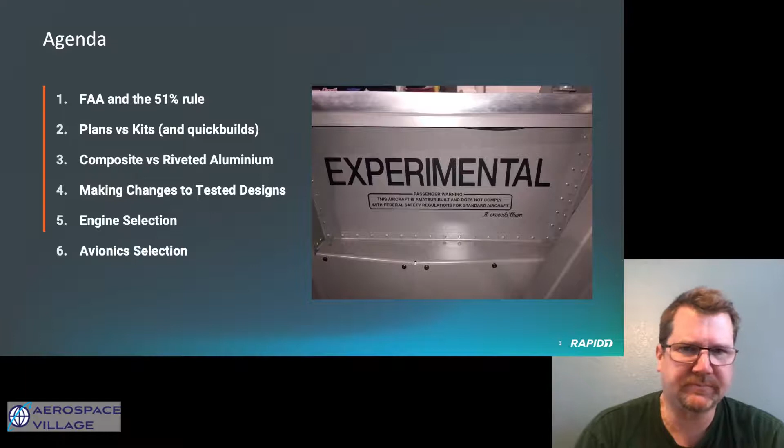So the FAA defines the language for what is permitted if you're going to build your own airplane. Certified aircraft have a ridiculous amount of regulations they have to comply with for safety, to ensure consistency and everything else, and it's one of the reasons that makes certified aircraft so expensive.

Experimental aircraft are not cheap by any means whatsoever, but they are a little bit more advantageous. The FAA defines the rules in Federal Aviation Regulations 21.191 Section G, and then they've got an advisory circular, 20-27, where they clarify some additional stuff because of what some of the other manufacturers are starting to do.

The biggest thing is you need to have proof. You need proof that this was built by a person and not a company. So this is basically taking pictures of your work, keeping a blog, keeping other records showing that you bought the components, that you put them together, something showing your progress.

The work can be started by someone else. You can actually buy somebody else's amateur built kit and finish it yourself. Of course, caveat emptor, you don't know what their skill set is, so you need someone who knows to help review it and be able to actually examine the work up till then and see if it's sound. And then you can also have help. That's how quick builds work. There are a lot of programs where you can actually go to a factory and do most of the work, and then you just have the instructors there to guide you so you actually comply with that 51% rule.

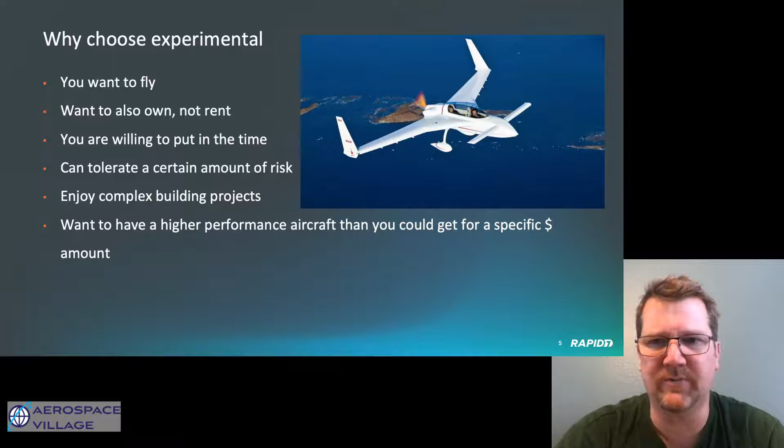So, how are you going to build it? There are a few different ways you can go about this. You can buy a set of plans. I actually have a set of plans here for my kit. This is a set of Cozy plans. It's a very thick, large bound manual that also comes with some very large format drawings.

So this is some drawings of the instrument panel using conventional gauges, and that's just one section. There are two sections in the plans that actually cover the whole thing.

The other thing you can do, when you buy plans, you source everything yourself. You're going to buy all the components - for example, all the fiberglass, all the epoxy, all the individual metal components. You're going to buy the engine, the airframe, the avionics, and build the airframe from scratch using just plans. It's the least expensive option. It's also the most time consuming.

The way kits work is you purchase the plans and partially completed parts, enough to qualify for the 51% rule. They have some quick builds where a lot of the stuff is done for you, but you still have to finish it. It greatly decreases the amount of time you spend, but also increases the cost. The picture I have here is actually from Sun and Fun 2017.

It's a Velocity Twin. It's a gorgeous aircraft, very high performing, beautiful inside, canard design, which you can kind of see my preference towards already. And then there's another thing called builder assistance programs, where you actually go to the manufacturer and they help you along the way, but ensure that you're actually doing enough to qualify for 51% of the work.

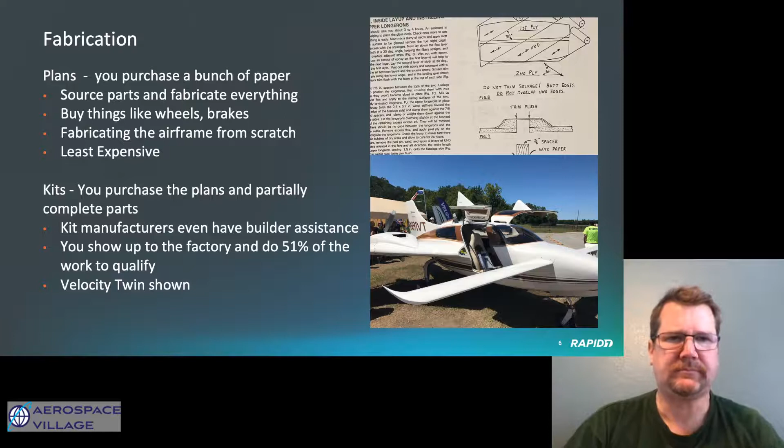And then there's different materials. So if you're going to build an aircraft, if you want just something low and slow, or maybe a small single seat aerobatic, fabric over wood is perfectly valid. The very first aircraft were made from these. You might have some just aluminum tubes, aluminum spars,

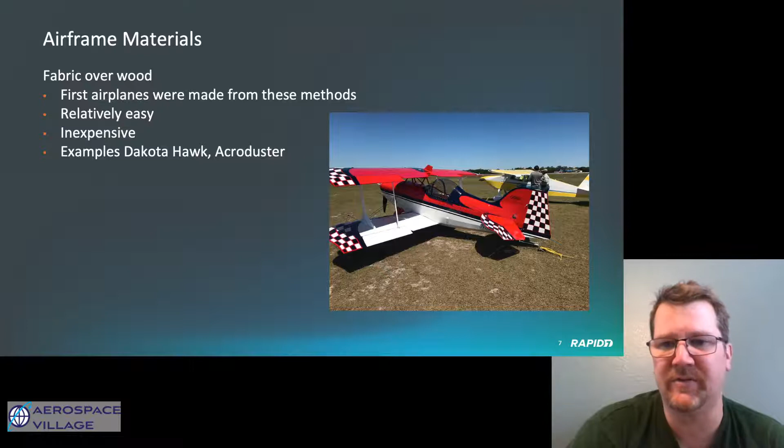and the rest of it's going to be wood. Wood's very easy to work with. It also can be very lightweight. And then you cover that with a doped fabric - a special type of fabric that's coated in epoxy to make it very rigid. Relatively easy compared to the other techniques, and inexpensive. This was just a gorgeous one that I saw at Sun and Fun. I'm not even sure if it's fabric covered, but it's the type of aircraft that you'll see.

Probably the most popular style out there, the one that has the most examples flying, is riveted aluminum. The Van's RV line of aircraft are all riveted aluminum, made with some composite components added here and there. That's how, for the majority of aircraft history, aircraft were built - aluminum held together by rivets. You have to be comfortable banging rivets, working with blind rivets, but it's very strong and light.

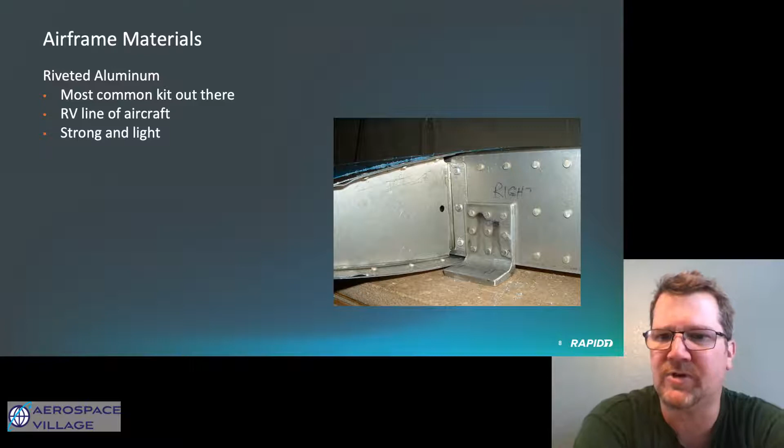It was only recently that aircraft construction moved towards composite, but you'll still see a lot of riveted construction out there for existing airframes. And now we get to my favorite, composite. So this is what I chose - fiberglass and epoxy, or carbon fiber and epoxy. You can see a beautiful carbon fiber airfoil here.

What is composite? Really, anytime you combine two materials, and when those two materials are combined, they form a stronger material, you get a composite. Concrete is a composite material because you have your aggregate, your sand, and your cement, and you get concrete. Sometimes with reinforcing structures like rebar added to it, but it's still a composite.

So fiberglass by itself is not a composite. Fiberglass, when it's bonded with epoxy, is a composite. Carbon fiber and Kevlar - not the bulletproof Kevlar, but an abrasion-resistant Kevlar - or also a couple of other fabric materials can be used in composite construction. In fact, newer aircraft like the Dreamliner are all composite construction. The 777X uses composite wings, and then conventionally fabricated fuselage.

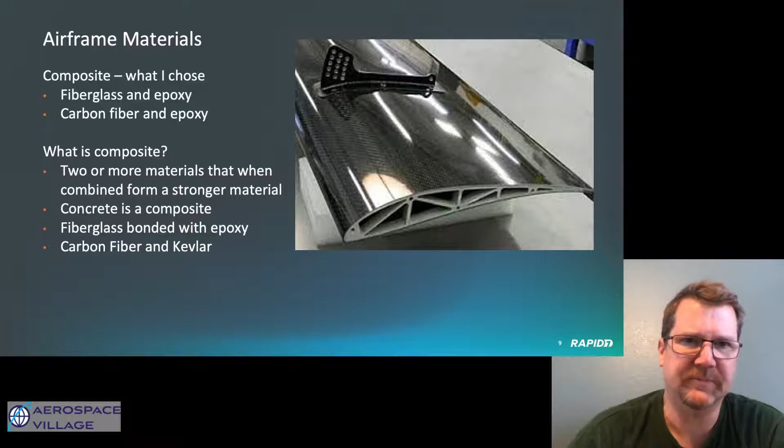So what I chose, the Burt Rutan design - this is a little bit about those, my favorites. He pioneered moldless composite construction, a method of fabricating fiberglass parts without a mold. You take a section of foam, and I have an example right here.

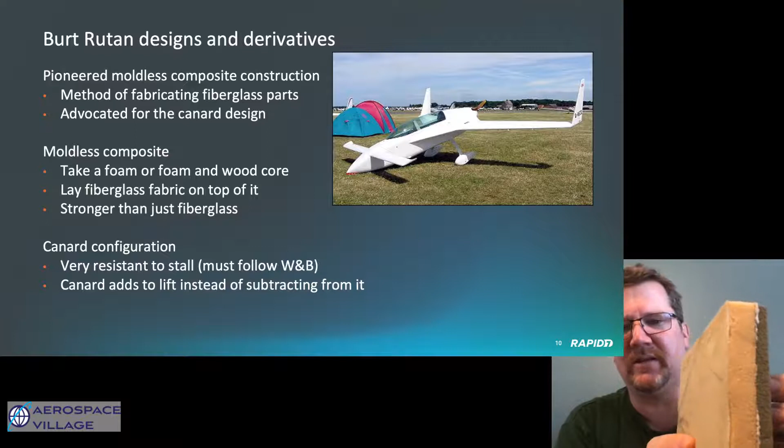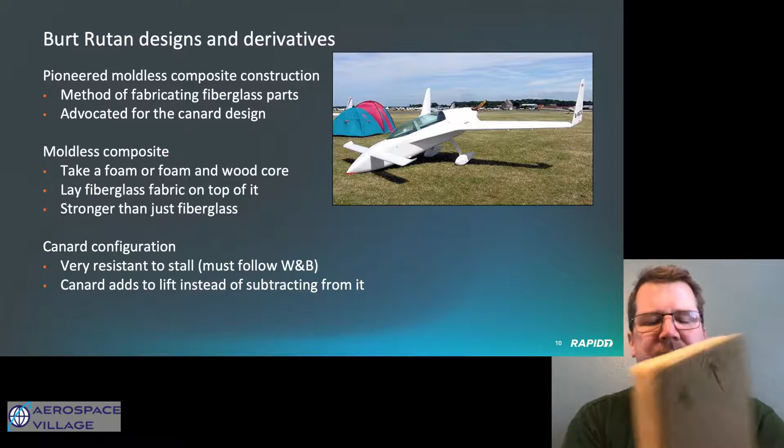For this image, this is a section that was actually removed from the aircraft I'm building. You can see you have your fiberglass and epoxy layer, but beyond it you have sandwiched types of foam, held together with microballoons mixed in with epoxy to bond both the fiberglass to the first layer of foam and then the second layer of foam together. On this other side, you're eventually going to get foam - not for this, this is a discard piece. Between the two, by having this space separated by the two separate skins of fiberglass, you get much stronger construction. You can basically take those shapes, lay them out, and then lay the fiberglass on top into its final design.

That was what Burt Rutan successfully did in his VariEze and his Long-EZ, and he turned that into Scaled Composites, which now is going into space with that design. He did Voyager, the aircraft that flew around the world without stopping, and many of his other brilliant designs.

He was a big advocate of the canard. I think some of the work has gone away from that, but I'll go into what a canard is in the next slide. Most of his designs were canard based.

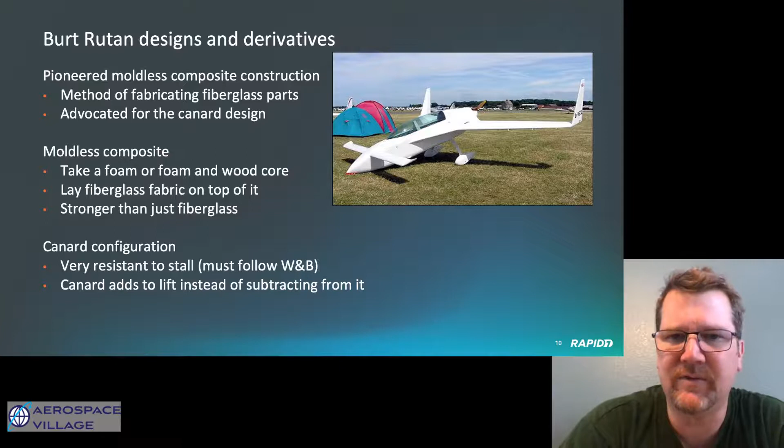Canards are very resistant to stalls. You still have to follow weight and balance, and always ensure that it's far enough forward so that the canard stalls first. But a canard adds to lift instead of subtracting from it, as I'll show you in the next image. This is all from Boldmethod.

In a canard designed aircraft, the canard always must stall first. If the main wing stalls first, you're going to enter into a situation called a deep stall, but it's a relatively easy thing to avoid as long as you follow weight and balance, which you're supposed to do every time you fly anyway. You'll never get into that situation.

So in a traditional, conventionally designed aircraft, you have your horizontal stabilizer that provides a vector of force opposite that of the wing - it's providing, in this image, 250 pounds of negative lift that counteracts the 2,250 pounds of positive lift. In a neutral situation, you have 2,000 pounds of weight in this particular configuration. In a canard, the idea is that it's more efficient because both surfaces are providing lift, both providing a positive amount of lift to counteract the weight of the aircraft.

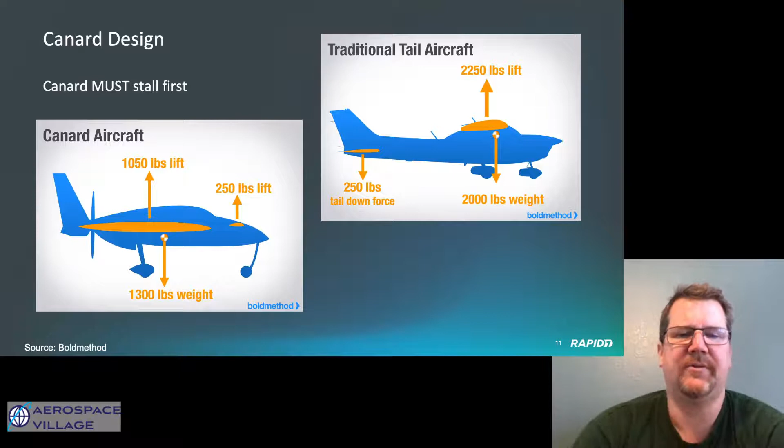And again, moldless composite, picture of the skin I just showed you, where you basically have a very thin layer of fiberglass embedded with epoxy. It's actually a very friendly method to get into.

Both the aluminum and the epoxy kits have what are called builder's confidence kits. You're like, I'm not going to spend $10,000 on a set of components just to see that this isn't for me. So you spend a little bit, they'll give you some epoxy, fiberglass and foam, and you do it. You go through several steps to show that this is something you're capable of.

In this other image, we have a canard-style wing for a Cozy that's up on a jig before it has the fiberglass applied to it.

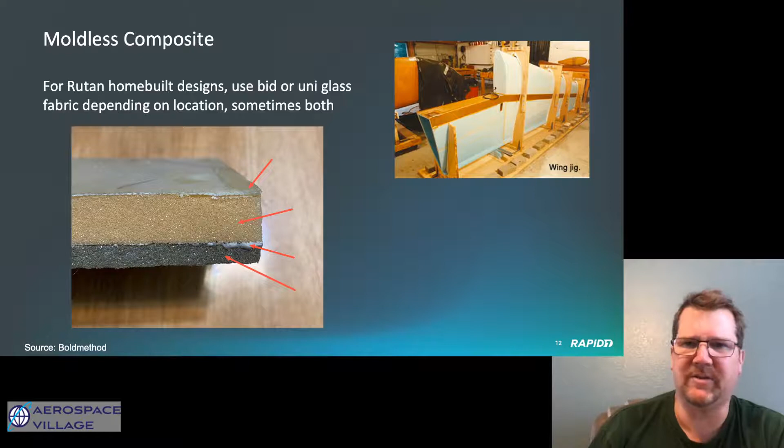This is where I got into the selection for the plans that I eventually chose. So Burt Rutan designed the VariEze, and then he designed the Long-EZ as a kind of ground-up redesign of that. The Long-EZ is a two-seat tandem aircraft. These pictures are from Sun 'n Fun 2017 when I took them.

And then the picture you see here is that of an AeroCanard that's still in partial primer. I was really interested in this one because it's the design I originally chose to go with.

Eventually I actually licensed the set of Cozy plans as well because I wanted to make sure everything was covered. There was some disagreement between Nat Puffer and the guy that designed the AeroCanard, which is a slightly roomier version of the Cozy. So to avoid any possible issues in design, I wanted both sets of plans because they're reasonably inexpensive, and I figured if something didn't give me a clear image, the other set of plans would.

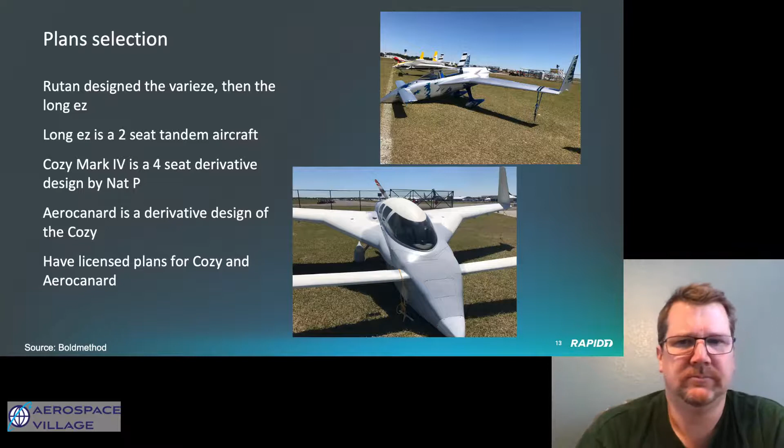So here's a little blurb about making changes. One of the biggest things I learned from lurking in the forums and talking to people is that any changes you want to make can have unintended consequences.

One of the earliest things I learned is, why wouldn't you take the fiberglass and use carbon fiber? It's reasonably cheap now. Well, you're not really going to save a whole lot of weight, but you are going to introduce completely different modulus of elasticity. You could add vibration elements that could cause something to shear and fail without anticipating it.

The other big line I heard was basically that your aircraft ends up being lighter because you're not going to be able to afford any avionics to put in it after all the money you spent on the carbon fiber. So you'll end up with a lighter aircraft that way.

It's pretty interesting when you dig into it and see that maybe carbon fiber isn't the best choice for all aircraft. There are aircraft that were designed around carbon fiber. The Berkut, which is a fast and slick version of the Long-EZ, is a carbon fiber variant, but it was designed from the ground up to have the amount of carbon fiber necessary for it.

And this is kind of a famous line from the plans: if you want to put something in your airplane, first throw it up in the air. If it comes down, it doesn't belong in an airplane. The designer was very minimalist in what he designed. He wanted this aircraft to go without a battery, without a starter, using just prop start.

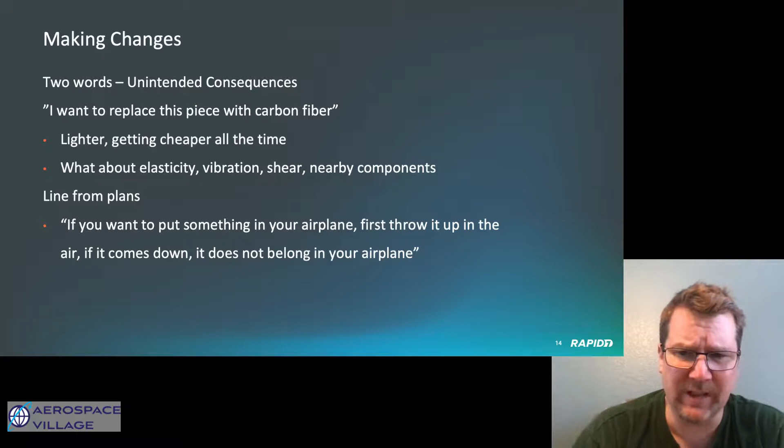The unfortunate accident that took John Denver's life. John Denver was flying a Long-EZ.

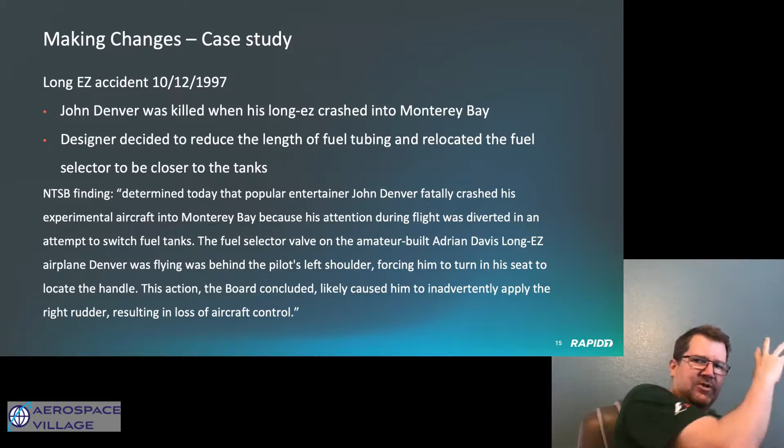The NTSB found that the probable cause of that accident was the designer decided to relocate the fuel selector valve. Instead of it being in front where it was easily reachable by the pilot, he relocated it to be closer to the fuel source. But what that actually did is, when you have to select it, you have to reach over your shoulder because you're kind of confined in there. So you have to do this maneuver to change the fuel valve. And when he was doing that, they say he probably unintentionally put control pressure on the rudder, causing a loss of control, causing him to fly into Monterey Bay, taking his life.

So the thought was, the designer relocated the fuel valve to make the fuel line shorter. By having shorter fuel lines, there could be less risk of a fuel leak, but it introduced other elements that weren't necessarily reconsidered from having the fuel valve up front. In the Long-EZ, the fuel tanks are behind you, the engine is behind you, so the thought was, let's put the fuel selector behind you as well. Maybe not the best idea.

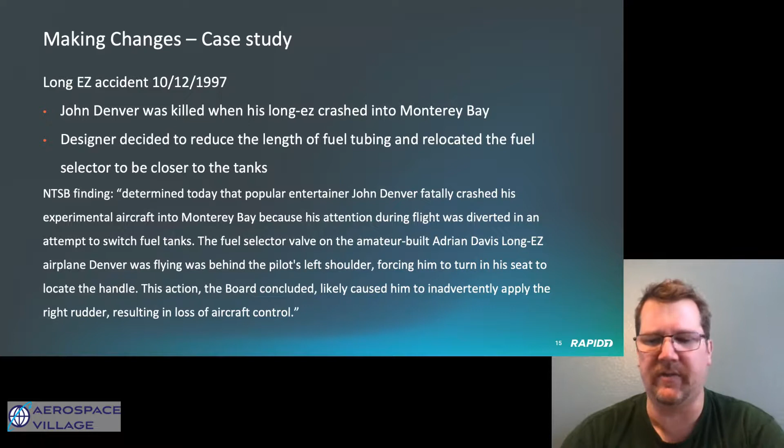It's a perfect example of the unintended consequences you can have from making changes, and why you really need to take a risk-based approach to any possible changes from what the designers actually intended, because experimental aircraft is inherently a risky activity.

Now here's a little section about engine selection. So when I was getting into this, I was debating, did I want to spend tens of thousands of dollars on an engine that was effectively a 50-year-old design? And that's what they all are. All of the air-cooled engines out there are really based on old technology.

But they're designed for the purpose where they're used. The thing I quickly learned is that the problem you run into with automotive conversions, and the Subaru is a big popular one because it's kind of the same horizontally flat, opposed engine...

You have all the cooling issues. You have to introduce some type of cooling system. Now you have a radiator, you have additional weight. You have to put in a reducing gearbox to slow the engine speed down to the appropriate speed for a propeller. That adds additional weight, additional complexity, and additional points of failure.

And then you have to deal with the fuel injection system. If you're using the automotive ECU, you may end up going to limp mode, and when you're in a car, you can just pull over. In an aircraft, you have to find a place to land immediately if you lose power. It can introduce an element of danger that's unexpected.

And what I discovered is they ended up not being cheaper. They ended up being heavier, more complicated, more prone to things that can go wrong. And because of all the changes you have to make, they end up not being any cheaper.

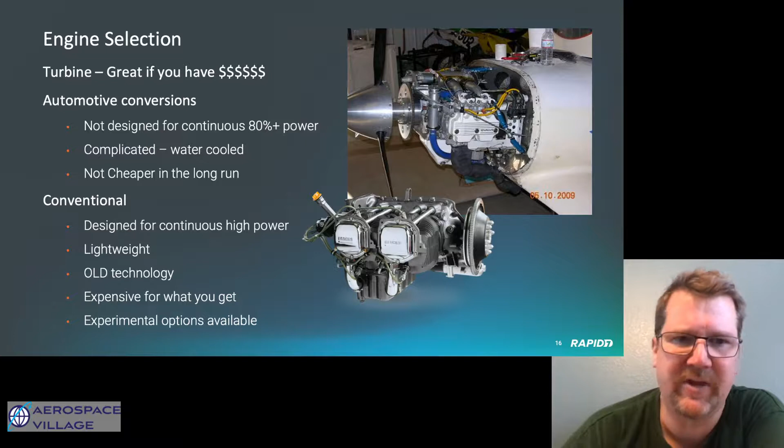All right, avionics, one of my favorite subjects. So when most of these designs came out, all you had were choices like your little round steam gauges, as they call them. You have your individual airspeed indicator, your horizontal situation indicator, your compass, your turn and slip, vertical speed, altimeter, and attitude indicator, all separate designs.

In a glass panel, you combine all that with a moving map, with a GPS, all your controls in a centralized point, but you're also introducing a central point of failure, so you need to have some additional plans for that.

But glass panel avionics are getting cheaper all the time. They're some of my favorite things to mess with, for those who've studied the previous research I've done. I think they're safer, I think they provide better situational awareness. Even in darkness, you're going to be able to see the terrain in front of you if you have a more recent system, because it's going to have the terrain database loaded into it. You're going to see that there's an antenna tower, whereas otherwise I'd have to refer down to a sectional chart and manually deconflict.

The aircraft is going to tell you that there's an issue coming up. All your approach procedures are going to be built into a database within the avionics. But what I feel these need are some backup gauges. Now, they have electronic backup gauges, but why not look for something reasonable and inexpensive, and just use a couple of must-have backup instruments as your backups next to your steam gauges? I think that's the best way to go.

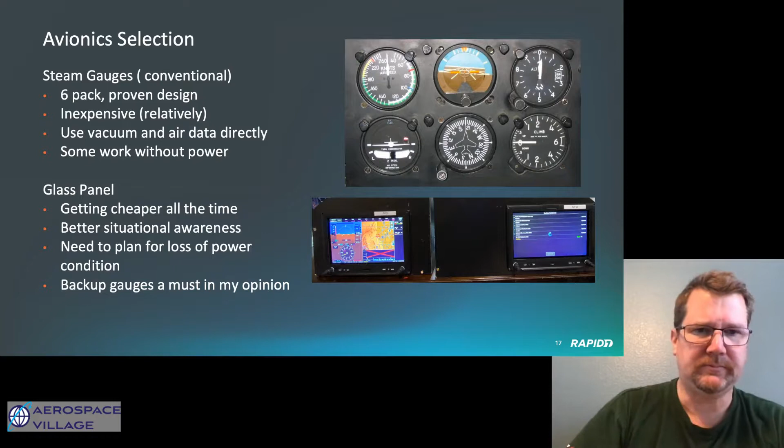All right, so a little blurb on avionics cost. We're going to take the Garmin G3X, for example. They make certified and experimental versions of the exact same display, running the same firmware — just it's been blessed by the FAA and received certification approval.

$9,995 for just the display. That's without any of the instruments, without your magnetometer, without your airspeed sensors, your various electronic gyros, any of your engine instruments — $10,000 just for the display, whereas the exact same experimental display is $3,895. So, in my opinion, that's the best choice in avionics.

What I like — the ones I've actually displayed, they're not mine, I've just done research on them — experimental glass with a few emergency backup steam gauges is a great combination.

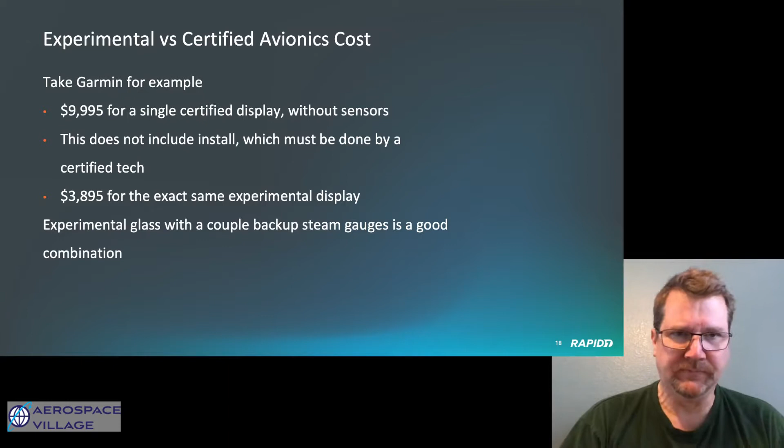Okay, so now that you've built your aircraft, what's the next step? You have to get a special airworthiness certificate. What you do is work with what's called a DAR, have it inspected, and get an airworthiness certificate that tells you you have to fly for 25 to 40 hours in a restricted area away from population. You have to fly out of a special airport that's away from everyone else, and fly off the number of hours to show that this aircraft is worthy to be operated on the same runways and areas that other aircraft operate.

And if you DIY this, you are a test pilot. But there are people you can hire for this. If you're not experienced, this is a level of risk you don't necessarily want to undertake. There are people you can hire that love to do this all the time, that are very skilled, especially maybe for your particular airframe.

But effectively what you have to do is build a test plan — same thing that test pilots would do. So the first thing you do is fire up the engine, test everything, then taxi around a little bit, shut everything down, inspect everything. Then you undergo high-speed taxi testing where you get almost up to flight speeds and then slow back down again. And then you have your first flight.

The biggest thing I see in these plan sections is that when you do this, you need to wear a parachute. I guess that assumes you've taken skydiving classes, but any parachute is better than not wearing one if you need to get out because you've gotten into an uncontrollable situation. This is probably one of the most risky areas of flight — it's where a lot of accidents happen because something was tinkered with, there were unintended consequences, and that's where disaster struck.